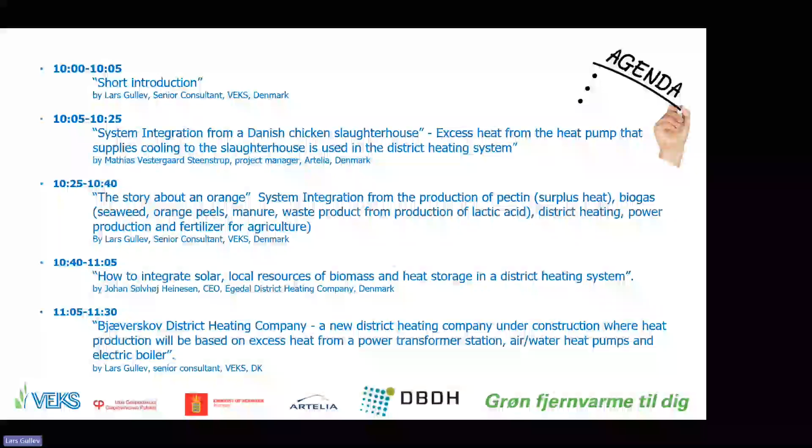District heating has until a few years ago been a secret in the European Union. It has not been on the agenda from our politicians in Brussels. But something has happened during the last 4 years. We have the EU Fit for 55 package with the aim to reduce the emissions of greenhouse gases inside the European Union by 55% by 2030.

And here, for the first time, the politicians introduced the so-called system integration or sector coupling. That was the first time that they put focus on the possibilities to connect the district heating sector with the power sector, the waste sector, the transport sector, to minimize the total emissions of CO2.

Then, as a consequence of the Russian invasion of Ukraine in February 2022, the European Union published RepowerEU back in May 2022, as an additional set of actions compared to what was already described in the Fit for 55 package, where the development and modernization of district heating systems would help replace fossil fuels with sustainable energy in individual homes.

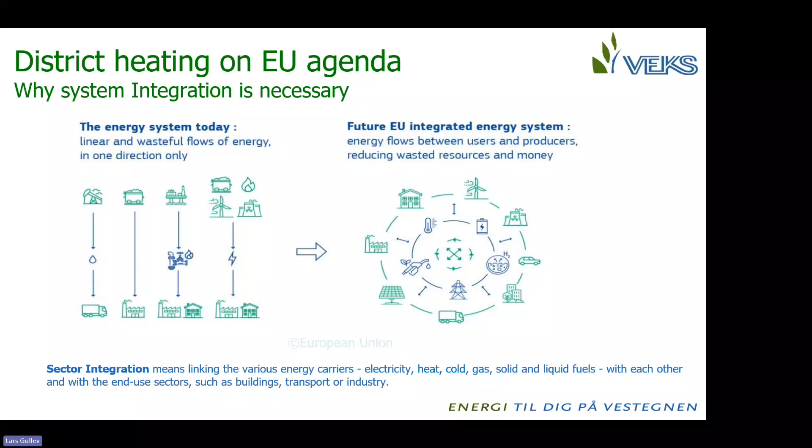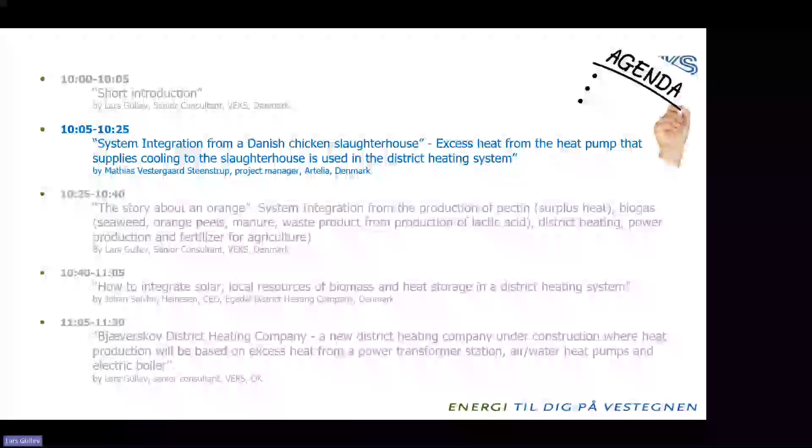And that's exactly what we try to put on the agenda for this webinar this morning, where we have 4 different cases describing different kinds of system integration between the district heating sector and other sectors.

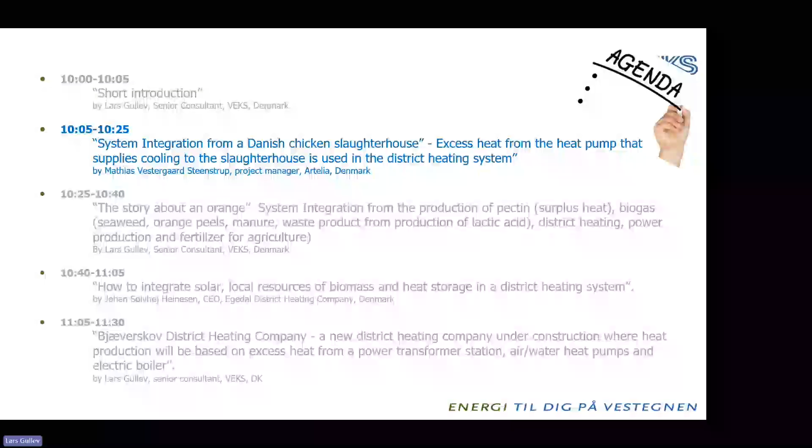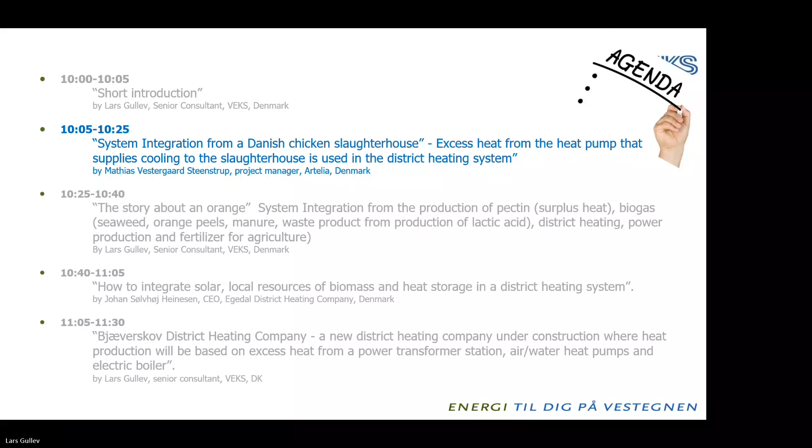So I will just start my presentation from the beginning here. Not sure if I can minimize this. Yeah. I hope that you can all hear me. Thank you, Lars.

I will start with a little correction to the headline. I'm talking about system integration of this Danish plant, but it's not a slaughterhouse, it's a processing plant, and I will come back to that later.

But in general, I'm talking about system integration in two ways: both the use of excess heat from industry, and also implementation of electricity-based production.

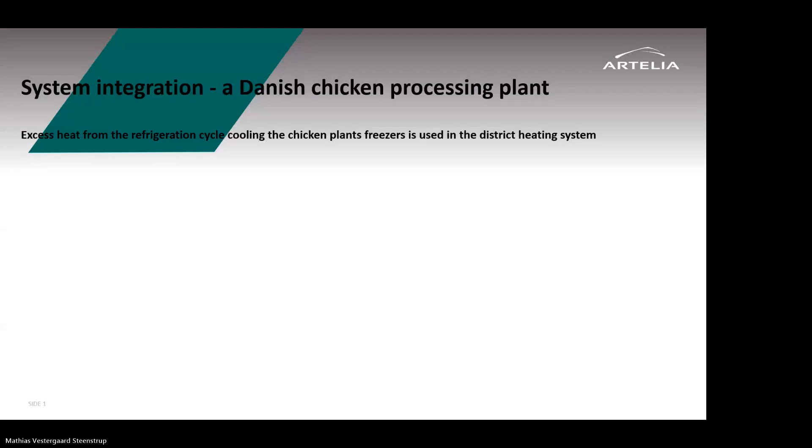Just a brief introduction to who I am and who Artelia, the company I work for, is. We are a company located all over the world, but in Denmark we have at least 1,300 people working in three main areas: buildings, energy and industry where I work, and infrastructure.

We have more than 90 years of experience, and we were part of the engineering team of one of the first large-scale power plants in Denmark. We're situated in 8 offices around Denmark, and if we look at the whole world, we have more than 9,000 employees located in more than 40 countries, with offices and projects in more than 100 countries, so more or less all over the world.

The case that I will be talking about takes place in the Danish city of Give, where a plant called Give District Heating is located. I think that Give is more or less a good representation of any given, or at least a typical, district heating plant in Denmark.

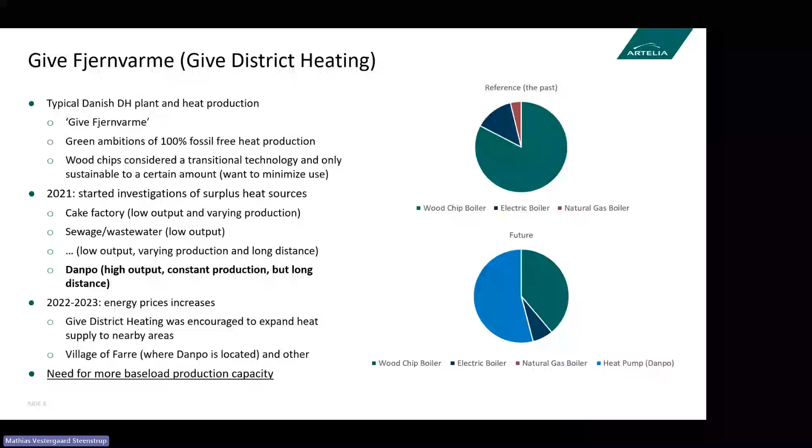And this village, Farre, is actually where Danpo is located. So now it would make sense in both supplying Farre with district heating and making the connection between Give district heating and the factory of Danpo. And of course, Farre is only one of the villages and cities that Give district heating could expand to. So this expansion of the district heating grid also increased the demand for baseload production.

So Danpo, it's not a slaughtering house, it's a chicken processing plant. I think one of the most famous products is probably the chicken McNuggets, which they produce in large scale. And actually, the excess heat is not coming from processing the actual food. It's coming from these freezer houses and the refrigeration cycle used to cool these freezers.

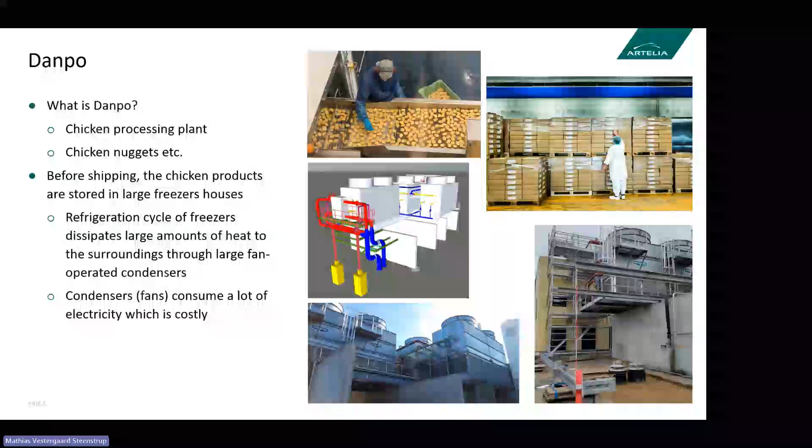This is actually the way from Danpo all the way to the consumers distributing heat. So we have to the left the freezer house of Danpo, and they have these condensers which blow air of approximately 10 to 20 degrees of heat out into the atmosphere. Instead of using these condensers, we put this heat in a heat exchanger, and I will show you a map later.

But the heat is then transferred from the Danpo factory to a building housing the heat pump. The thing is that the space or the area around the factory is more or less occupied, or the Danpo factory wants to save area for future upgrading of their production lines and so on. So actually there was a need to find another location for the actual heat pump.

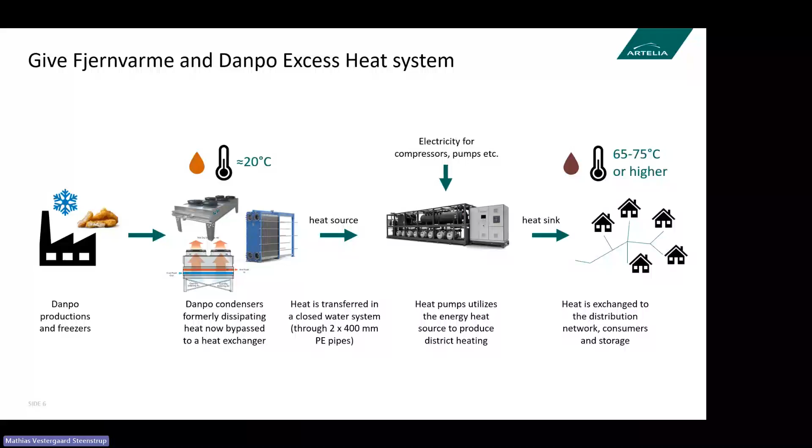Now, in order to make an agreement with a private company such as Danpo, there's a lot of considerations that has to be made. Of course, what will the price of heat be? So you're exchanging something that may not be of value to Danpo, but you are making some interference within their production, so there will probably be a price of that heat.

Also, the district heating had to consider how reliable this source of heat would be. In this case, the freezer houses will be running constantly, and they had actually plans of expanding the freezer houses. But as it is with any private company, the source of heat cannot be relied on 100%, as Danpo is on the free market as any other private company. So you have to consider what would be the outcome if Danpo decreases their production or if the company closes. That's many of the considerations that you need to make.

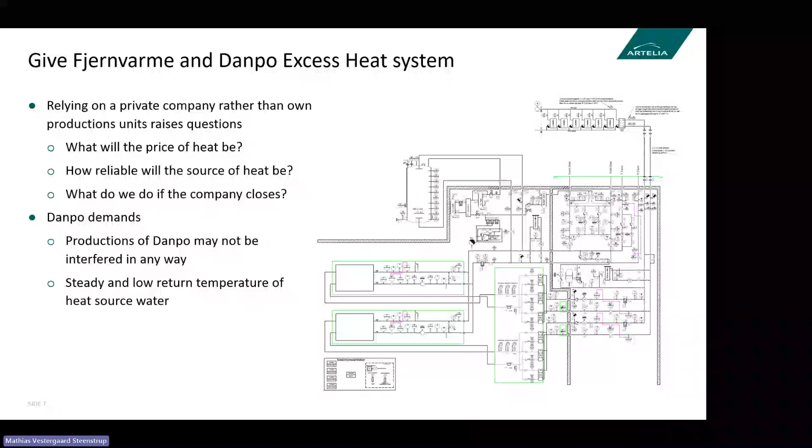Actually, as I said, the production from Danpo is more or less constant, but in the summer they actually have a slightly higher cooling demand because of the ambient temperatures and so on. So actually, in the summer we can produce more heat from Danpo, which is not really of interest to the district heating company, as we consume the most heat during the winter.

So it's quite an opposite situation we have here, and that's also why we in this project made a storage, quite large storage, so that it can also handle future industries and excess heat sources, just like Danpo. So most of the heat in the summer will be transferred through this transmission line of 4 kilometers up to the Give District Heating central.

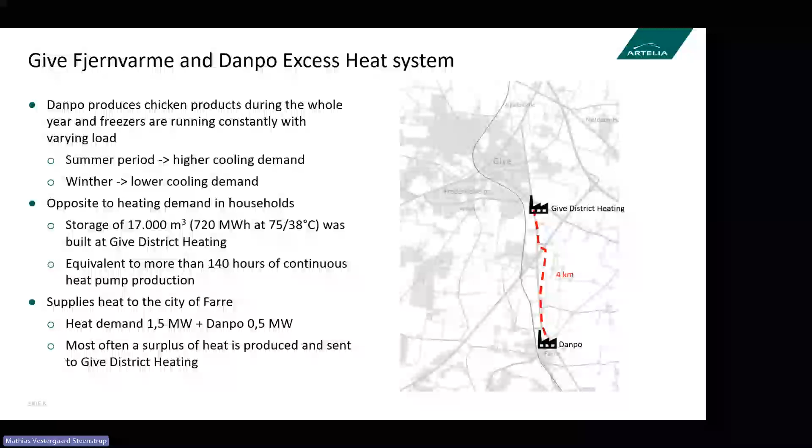This is a map showing that we have Danpo located here in the northern part of, or actually the picture is turned around, so it's actually the eastern part of Farre. And we have this red line, which is the line of this, we call it process water. It's a closed line between the Danpo evaporator or condensers and the evaporators of the heat pump. I think it's around 700 or 800 meters.

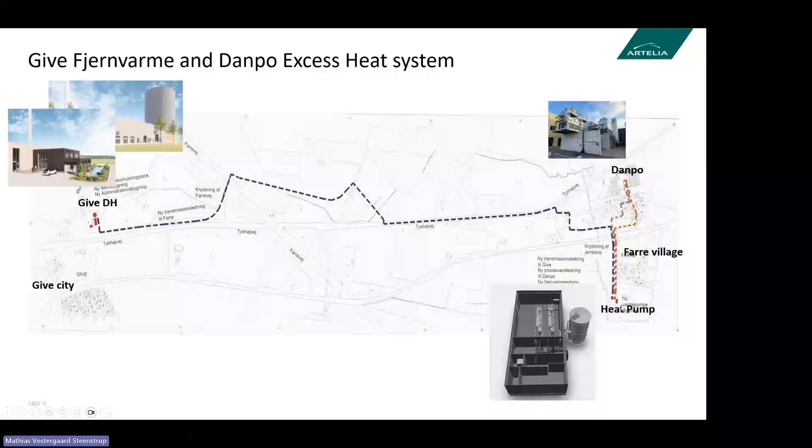We're transferring this process water of 10 to 20 degrees, which is then cooled in the heat pump building and sent back to Danpo. And then we have the transmission line going all the way from the heat pump building to Give District Heating. And of course we have the distribution system for the Farre city to distribute heat to the consumers there.

The heat pump is made of 2 modular heat pumps called H3000. It's a Fenagy heat pump, utilizing CO2 as a refrigerant. Could also be other refrigerants, but at this moment CO2 was the most feasible refrigerant, and these heat pumps were chosen because of the efficiency and the reliability.

So it can produce around 5 to 6 megawatts of heat capacity. I actually think it can produce more than 6 megawatts. I have a sample from the commissioning, which is ongoing right now. Only one of the two heat pumps is in operation, but as you can see in the graph, we are producing just above 3 megawatts of heat.

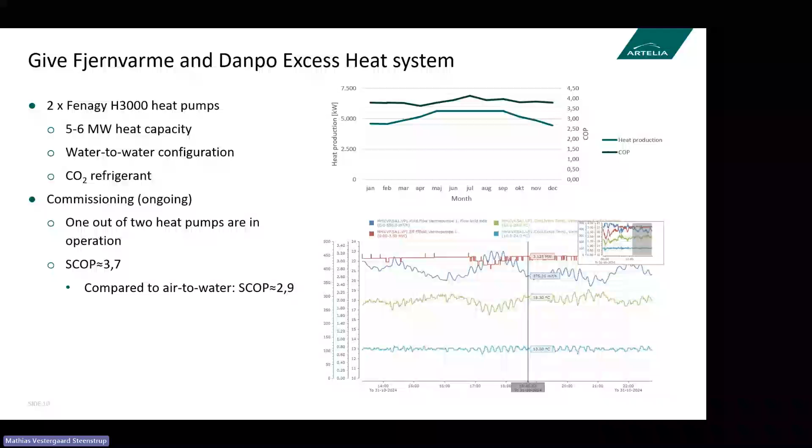I do not have the COP here, but from this commissioning I was told the average COP was around 3.7. To compare with an air-to-water heat pump under these conditions, the average COP would be around 2.9 over the year. So by utilizing this excess heat, we are increasing the efficiency quite a lot.

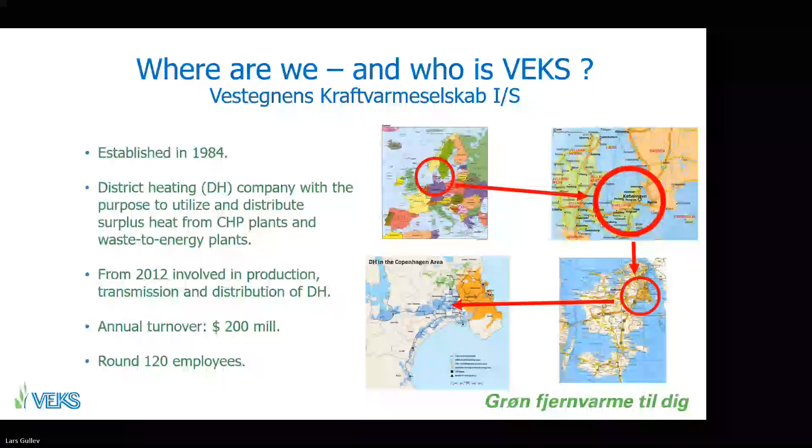We are part of the Greater Copenhagen District Heating Scheme, which consists of 4 district heating companies on the transmission level, supplying around 500,000 end users in 20 municipalities. The total system spans 40 kilometers from east to west, and I'm representing the company responsible for the district heating supply in the blue area.

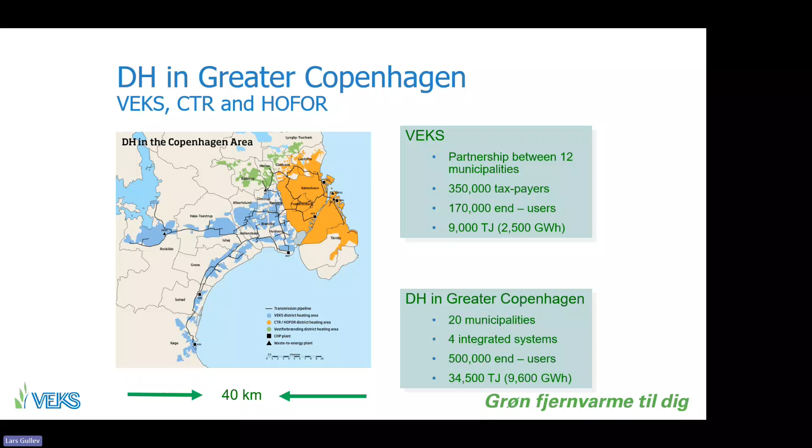The Danish district heating history is in fact the first step to system integration—integration between the waste sector and district heating sector. So the integration of renewable energy sources and system integration, it's not so complicated. In fact, it started more than 120 years ago, in the area where DBDH has its office. DBDH's office is neighbor to the place where it all started.

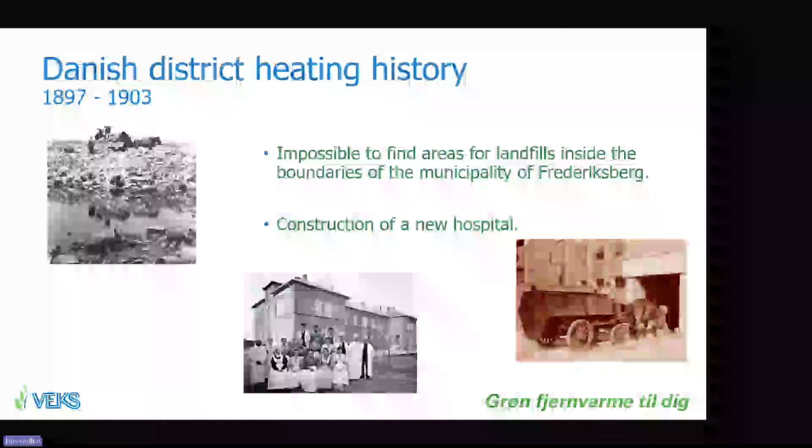Back in 1903, a waste incineration plant was built. The problem was that more and more people were moving to Copenhagen, and it was difficult to find free areas to get rid of garbage. Therefore, it was decided to build a waste incineration plant, utilize the surplus heat from that plant to heat a new hospital, and use the steam produced at the waste energy plant for cleaning equipment at the hospital. So this kind of system integration started back in 1903.

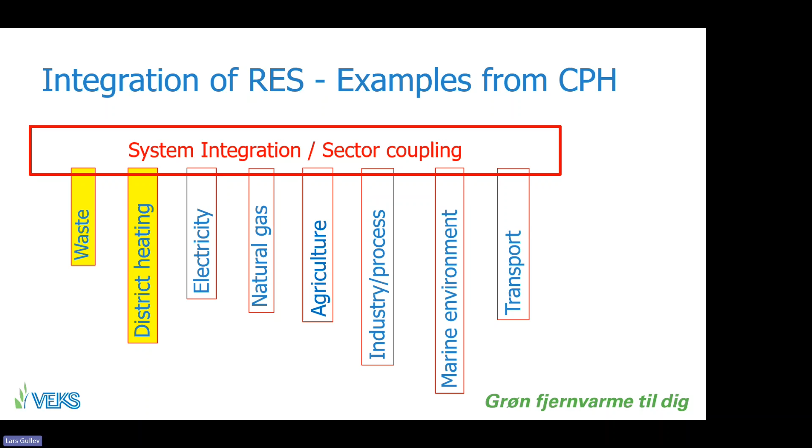We have developed the concept since. The case I will focus on in this presentation covers more than these sectors—it's a story about energy efficiency and storage, about an orange, where we cover all these different sectors. What we try to make in this case is a horizontal integration of waste, district heating, electricity, natural gas, the agriculture sector, the industry sector with utilization of process heat, the marine environment, and the transport sector.

How to do that—you can say it might be very complicated, and it is, but it's also simple when you've heard the history. It starts with oranges produced in Brazil. In Brazil, the oranges are juiced and oils are taken out of the peels. Then the peels are dried and shipped across the Atlantic Ocean to the eastern part of Denmark, to a city in the southern part of our supply area.

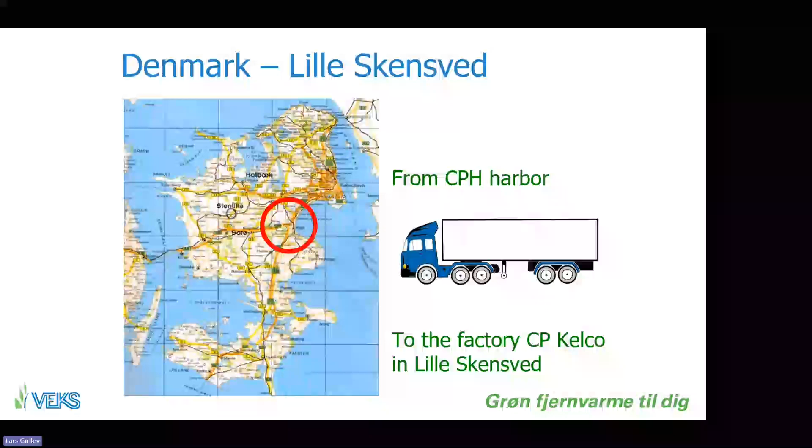Here you have the southern part of our supply area, where we have our own combined heat and power plant based on 100% sustainable biomass.

We have the CP Kelco factory where we utilize surplus heat, a gas engine, and a biogas plant. What we have here is a public-private partnership between CP Kelco, an American-owned company based in Atlanta, Georgia, and the VEKS company, which is a partnership between 12 municipalities.

So quite different partners here around the table: CP Kelco with 100% focus upon profit and very short payback time for their investments, and a district heating company with patient money, where we invest in projects with payback time between 10 and 20 years.

The purpose here is to utilize surplus heat from the CP Kelco production. What they produce is pectin, a product some of you have heard about before, and for some it's quite new. It's a substance you find in fruits, just inside the peels, and you use it to stabilize the viscosity of fluids. So you'll find this product in marmalade, in products from dairies such as yogurt and smoothies, and you can even find it in shampoo.

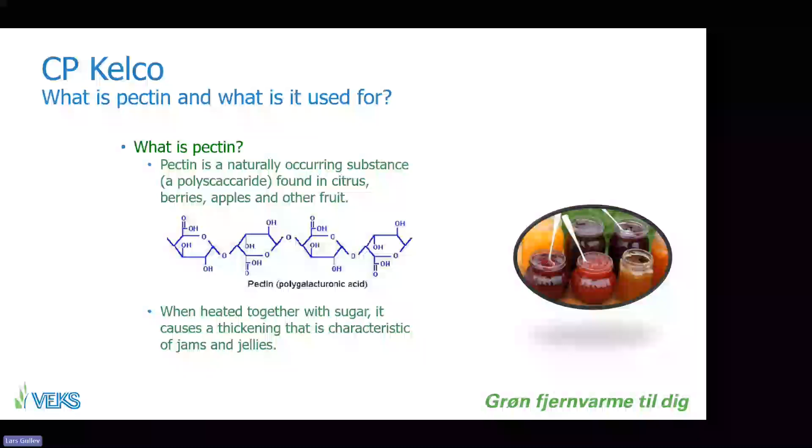During this process to extract pectin from the orange peels, they create a lot of surplus heat. Until we went into a dialogue with the company, they sent all this surplus heat into the cooling towers just to get rid of it. But we started a dialogue to look at the possibilities to utilize this surplus heat.

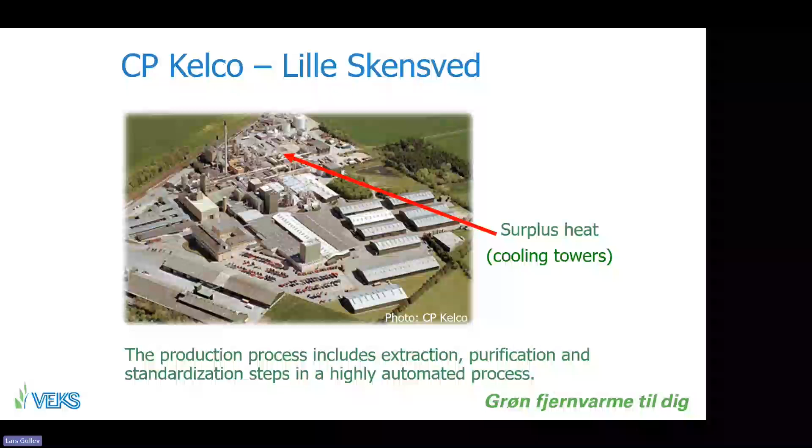We spent 2 years to make the contract and 1 year to fit together the pipes, and we established a connection to the factory you can see here. To the left, we have the process water from the company with a flow temperature of 75 degrees C, and then we have the return pipe from the district heating system with a temperature of 47 degrees C.

Then we heat the district heating water in a heat exchanger and increase the temperature from 47 degrees C up to 72 degrees C. Part of the year, that's enough as flow temperature in the district heating system.

In winter time, it's necessary to boost the flow temperature from 72 up to 85 degrees C, and we do that by using a heat pump. So we have a district heating flow temperature of 85 degrees C.

At the moment, the heat production from this unit, from this factory, covers around 50% of the heat demand in the city. In the future, it will cover 1/4, 25%, because we are developing the district heating distribution systems in this area in the regime of Køge District Heating Company.

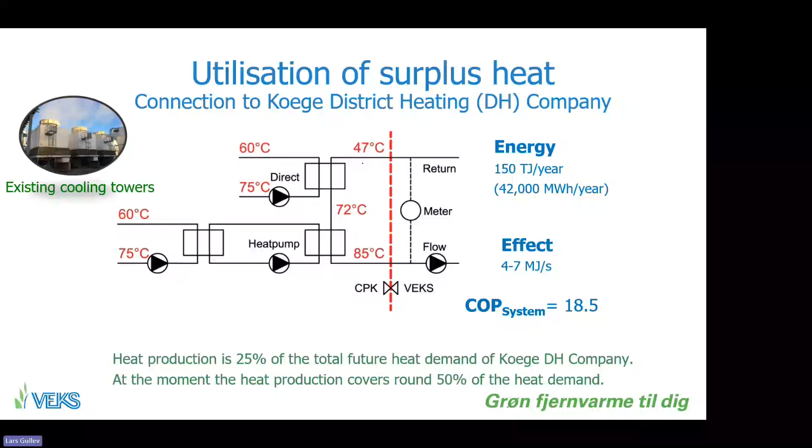The agreement's benefit for the factory is that they now have a good customer which takes heat all year. Their alternative to making this agreement was to cool off the surplus heat using cooling towers.

The benefit for us is that we have a constant supply of surplus heat, which in the next years will be relatively cheap heat, and that will support... the consequence is that we will have a lower price for the heat coming from this factory than our alternative heat suppliers. For both companies, it was amazing to see how important the green footprint of this process was, even for an American-owned company.

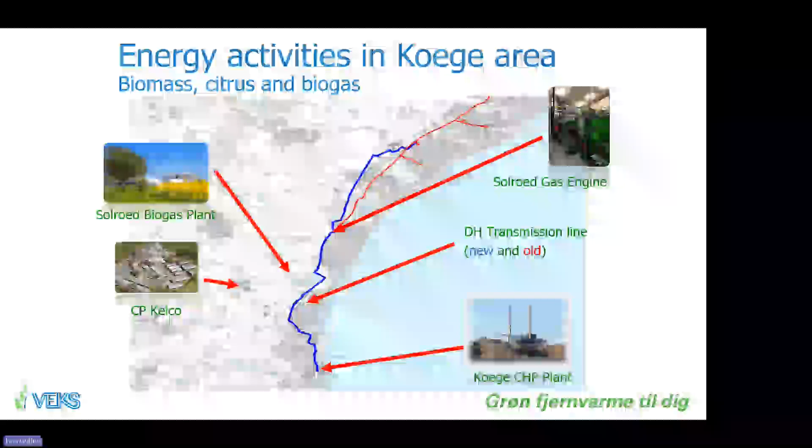When they have taken out the pectin from the peels and we have utilized the surplus heat, the peels are brought to a biogas plant. In this biogas plant, they put 80,000 tons of these orange peels, 53,000 tons of manure from cows and pigs, more than 7,000 tons of seaweed from beach cleaning, and 60,000 tons of a byproduct from a pharmaceutical production. So all these raw materials are mixed together.

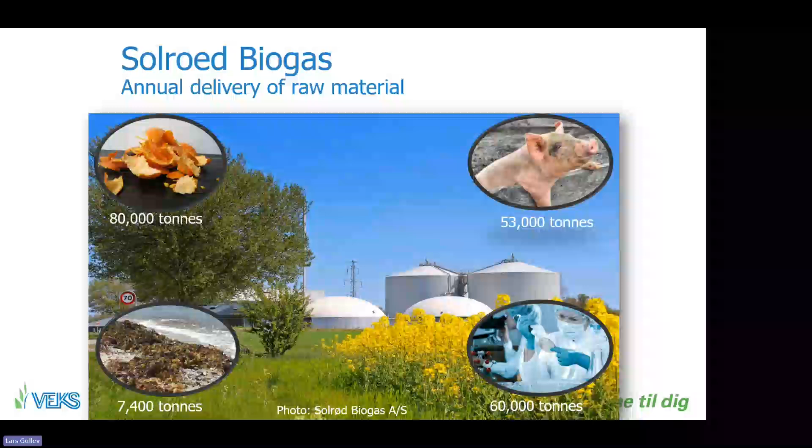As a spin-off of these processes, they generate a lot of biogas. This biogas is produced at the Solrød biogas plant. It's owned by the municipality of Solrød, and the municipality has signed a 5 years operation and maintenance contract with a private company. So they are not directly involved in daily operation of the plant, they are just owner of the plant.

Then Solrød Biogas made the contracts to buy the raw material from the farmers. They contract to buy these orange peels and also the byproduct from the pharmaceutical company. Then they sell the biogas partly as upgraded gas to the national natural gas grid or network, and partly as biogas to our company VEKS. And then they sell the degassed biomass to the farmers, and I will come back to that.

So VEKS, we buy the biogas, we use it in a gas engine, we sell the electricity from the gas engine to the power grid as green electricity, with an attractive feed-in tariff. And then we provide district heating for the transmission and distribution network based on the cooling of the gas engine.

The raw material you can see here contributes to the total gas production in different ways. The primary production of methane is based on the materials from CP Kelco. Around 75% of the total amount of methane is based on these orange peels. But the rest of the raw material contributes to the production of biogas and to the afterward degassed biomass in different ways, and you will see that later in this presentation.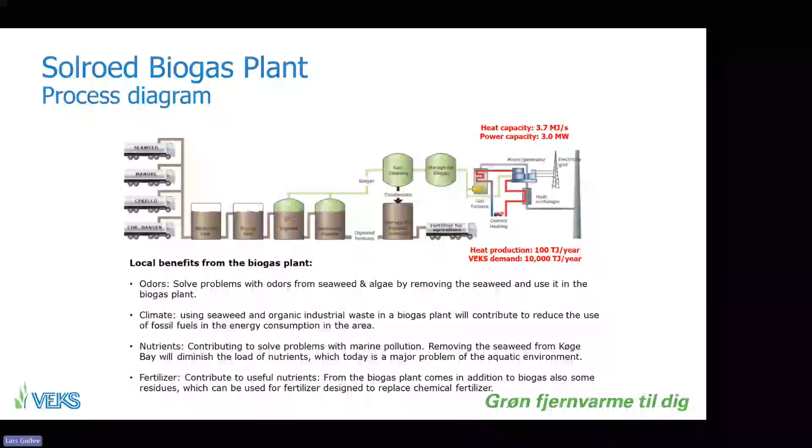We have made an agreement with the Solrød biogas plant. We have invested in the gas pipeline and the gas engine. If Solrød biogas plant decides to stop the delivery of biogas to us before we have depreciated our investments in the gas engine and gas pipeline, we will be compensated for the remaining depreciation. So we have no risk there. We have a guaranteed production price out of the gas engine, linked to the cost of buying heat from waste-to-energy plants - it's 10% lower than our price if we should buy the heat from a waste-to-energy plant instead. So we have no finance risk in the contract.

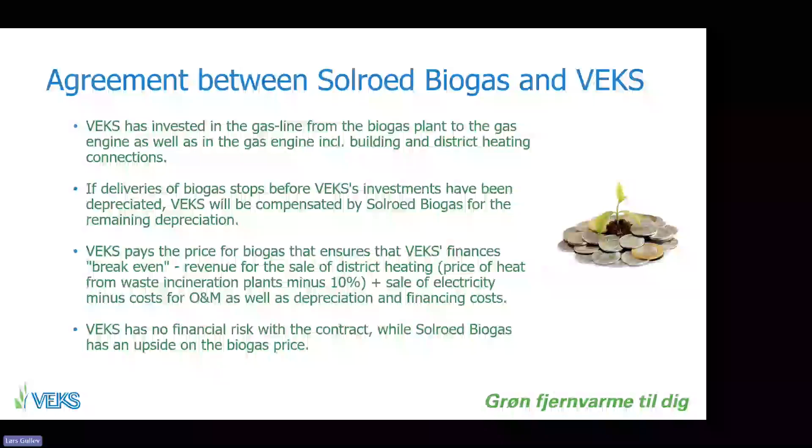While Solrød Biogas has an upside on the biogas price, we have no risk but also no profit. But we have a guaranteed economy in this agreement. The gas engine produces 3 megawatt green electricity to the grid and 3.7 megajoule per second green district heating as output.

When the biomass is degassed, it's brought back to the farmers where it substitutes conventional fertilizer, which is a big benefit for the environment. So it's circled back to the farmers, the manure they brought into the biogas plant. This biogas plant is essentially an environmental installation which solves environmental challenges, and then it has biogas or energy as a byproduct.

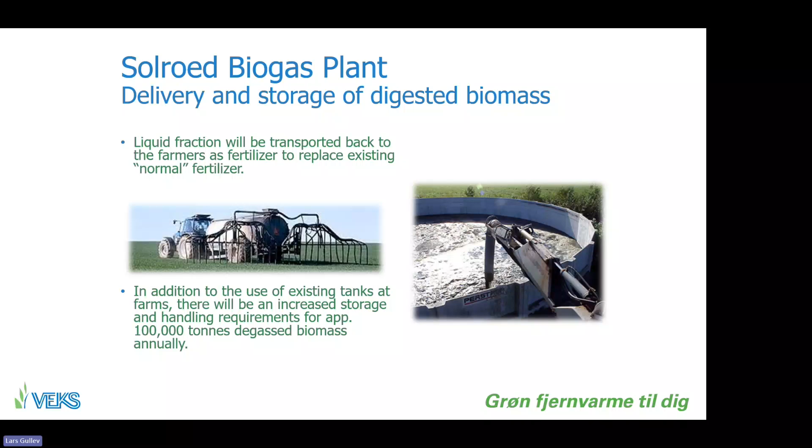What you see here is important for the environment. We reduce the CO2 emissions dramatically. We reduce the amount of nitrogen and phosphorus, which otherwise from the farmers were washed out to the Baltic Sea, which would influence the environment in the Baltic Sea, both for us as Danes, but also for you as Polish people.

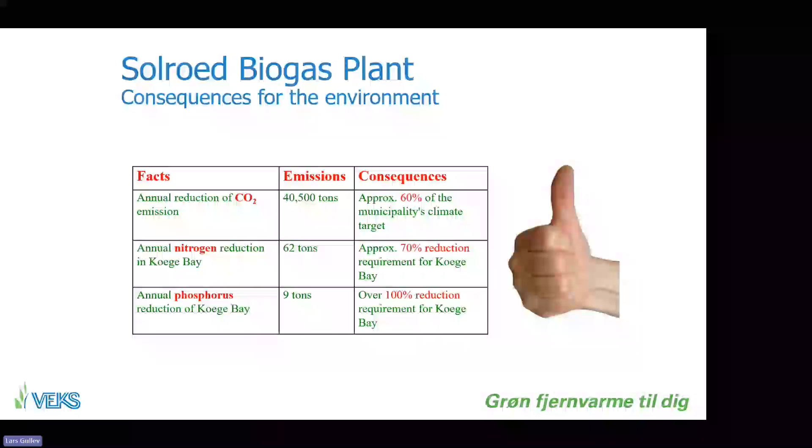So this is an example of how we, with this concept, have integrated all these sectors. And when I mention transport here, it's because when they upgrade this biogas and put it into the national natural gas network, this gas can be used for transport for heavy traffic.

So to summarize, if we want to utilize these renewable energy sources, it's necessary that we have a well-functioning district heating system, because without such a system we couldn't use the surplus heat from the production of pectin, and we couldn't use the biogas in the most efficient way. So without a well-functioning district heating system, these huge renewable energy sources would be lost for society.

It's also important to mention that it takes time to set up such a concept, which we have done here. The secret is that you need the imagination to look at one process and see what byproduct or waste product you have, and for which process can this byproduct or waste product become a resource instead of a waste product. That's what we have succeeded with here.

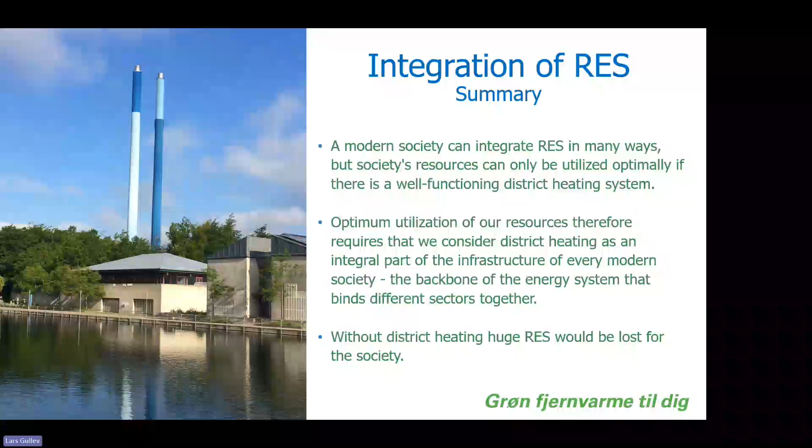We have got cheaper district heating for our customers. We have solved environmental problems with emissions of phosphorus and nitrogen, and we have reduced CO2 emissions. So all in all, a good project with a short payback time.

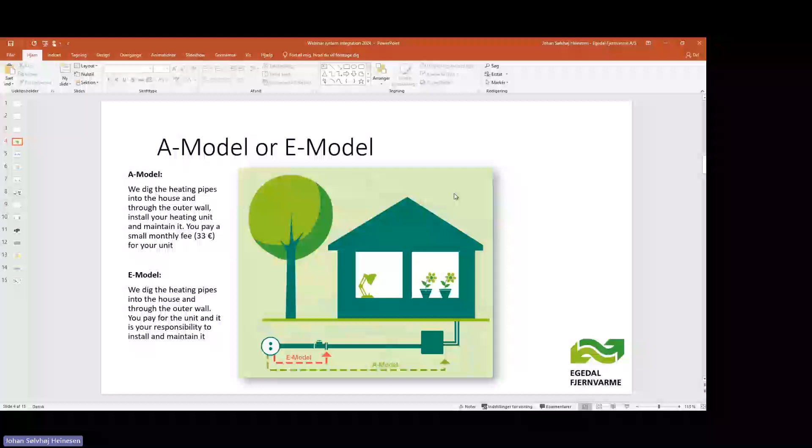So we get rid of the old boiler and install an HIU, and we own it and maintain it, and they only pay a small monthly fee. So all they have to do is pay 2,000 euros to get a connection, and then we can look after the heating inside their houses.

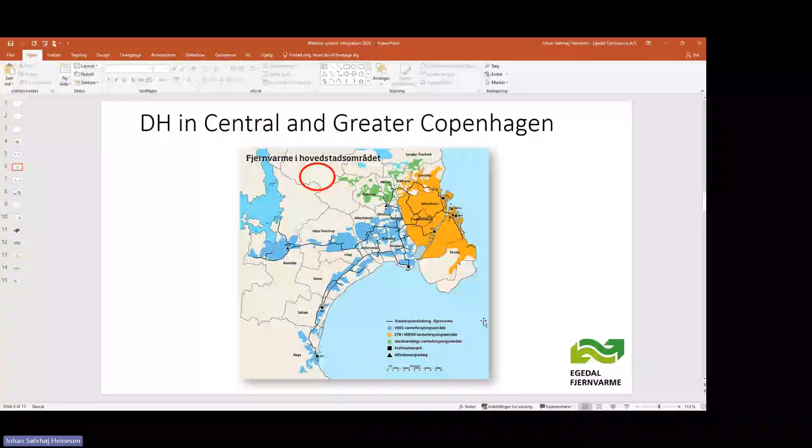But we are out in the middle of nowhere. You can see the system Lars works in, in blue, down south, and we don't really have a connection to anybody, so we have to look after our own production.

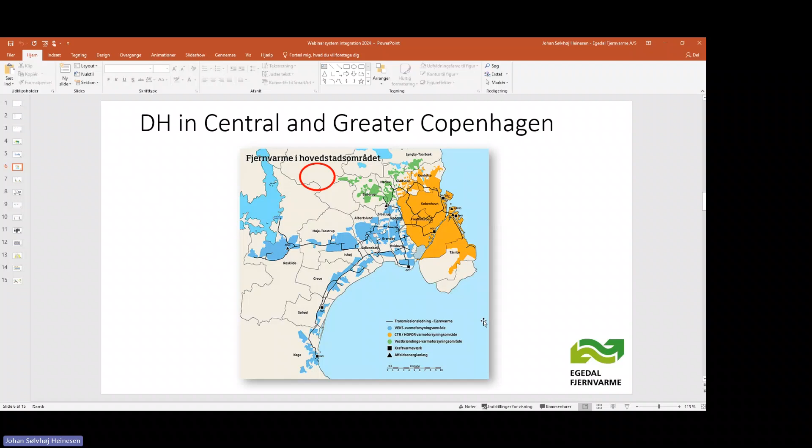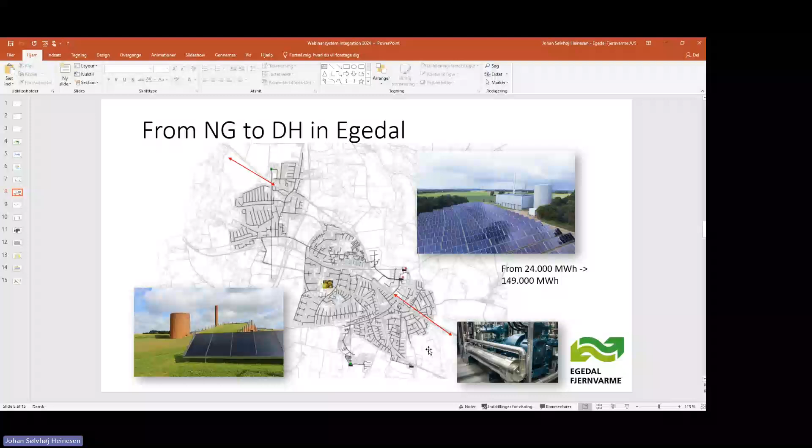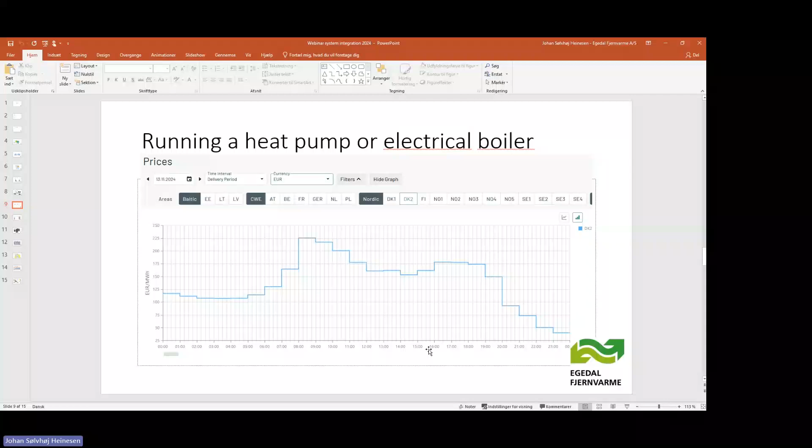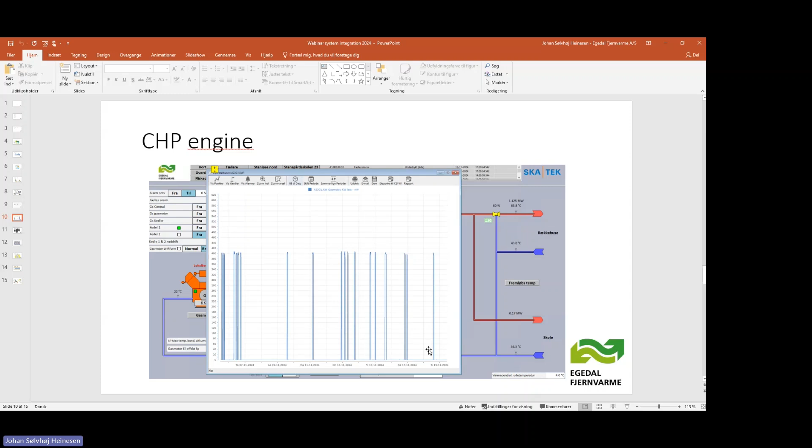We also have one small CHP engine left, and that is not being operated by us. Of course we maintain it, but it's being put into operation by an electrical operator. So every time the price of electricity is high, and it is that sometimes, then they turn on the gas engine, so we produce electricity for the grid and district heating for our network. We used to have 3 of them, but 2 were too old, so it wasn't a good business case to maintain them. Now we only have 1 left.

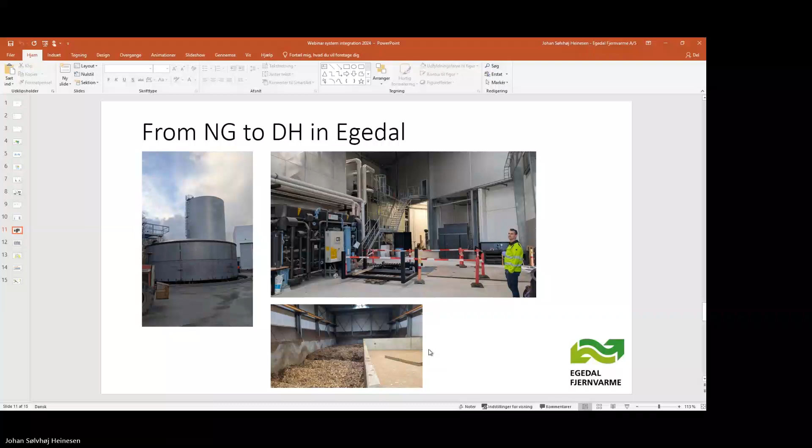This is just a picture of the biomass plant, where you can see the storage tank we have right now. And of course, we are running that.

They are looking at the price of electricity all the time, the guys operating it. So if the price of electricity is high, they are lowering the production on the heat pump, and then the biomass is taking over. But of course they want to run the biomass plant on a steady production, and not too higher production. So we always have the cheapest possible heat in our storage tank. And that's the way all the small Danish companies are using their plants, if they have biomass and other production as well.

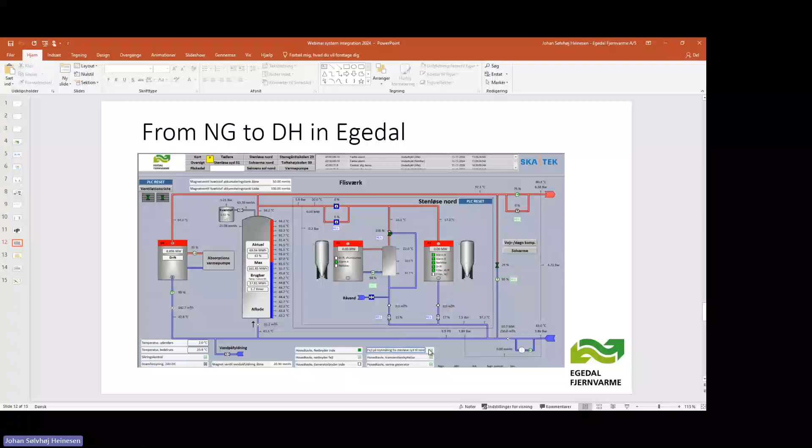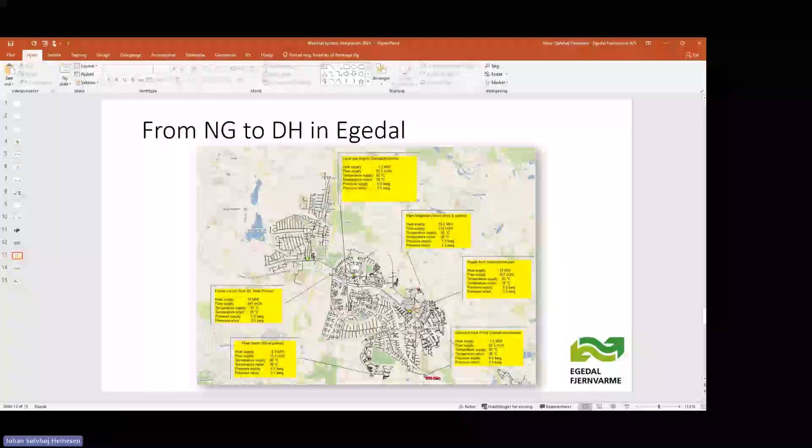Johan, could you go up to full screen? It's not in full screen. No, no. Okay, better now? No, it's the same, but I can see you do what you can. Okay, I'm doing what I can. Yes, sorry about that. I hope you can see something at least.

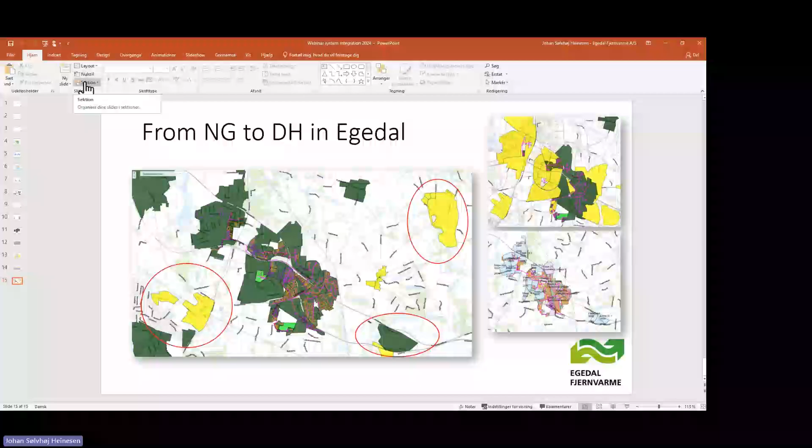Okay, good, thank you very much, Johan, for your timing of your presentation. Yeah, that's fine, because I could see that you were short of time, so I had to speed up a little bit. Yeah, fine. And I have to leave now, so if you have any questions, feel free to reach out. I know that Pia and Lars have my contact information. So, good, enjoy the rest of your day. Yes, thank you, and thank you for your help. Welcome, good.

So I will jump directly to the last presentation, and that will be a presentation about a district heating company which is just born, so it's under construction at the moment, but it's still interesting when we talk about system integration, and especially when we put focus on the process from the first ideas, the step from vision to...

You can't see it? Is it visible, my presentation? It works for me. Yeah, it works, nothing happens. Good. Yeah, okay, I'll just go on.

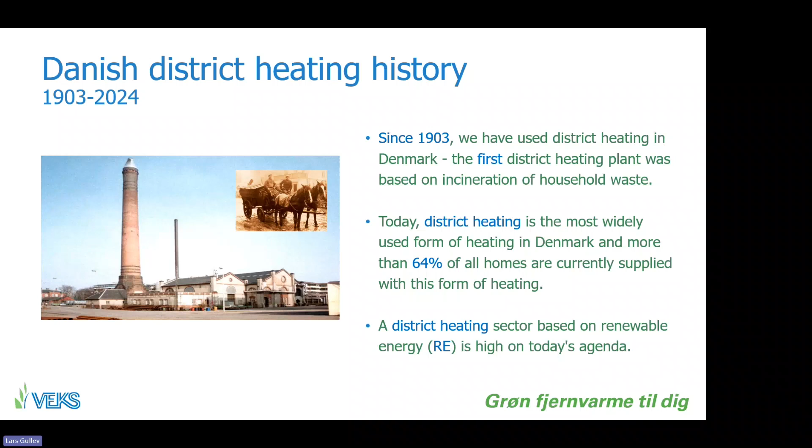As mentioned in my first presentation, we have worked with district heating and system integration since 1903. And today we are in a situation in Denmark where 64% of all homes are supplied with district heating, so it must be described as a success. District heating based on renewable energy is high on the agenda today, also in the Danish parliament. But we are not done yet, we are still expanding the district heating systems in Denmark.

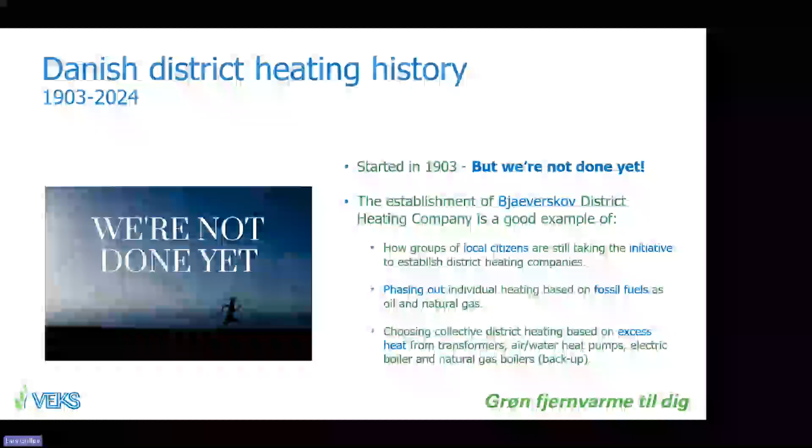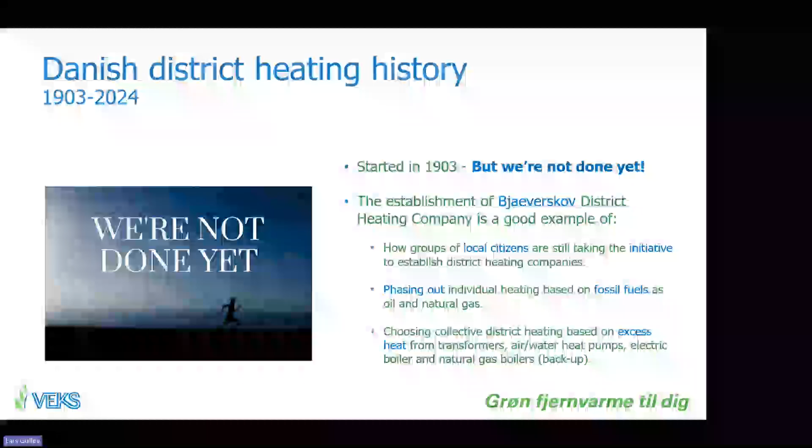This presentation will put focus on a new district heating company, the Bjæverskov District Heating Company, where a group of local citizens have taken the initiative to establish a district heating company from scratch. They wanted to phase out individual heating based on fossil fuels such as oil and natural gas, and they have chosen district heating based on excess heat from power transformation stations, from air-water heat pumps, and from electrical boilers, with a natural gas-fired boiler as backup.

So here we have system integration between the district heating sector, the electricity sector, natural gas, and again an industry process, if you look at a power transformer as a kind of industrial component where you have some excess heat. We are again in the eastern part of Denmark, outside the VEKS district heating supply area.

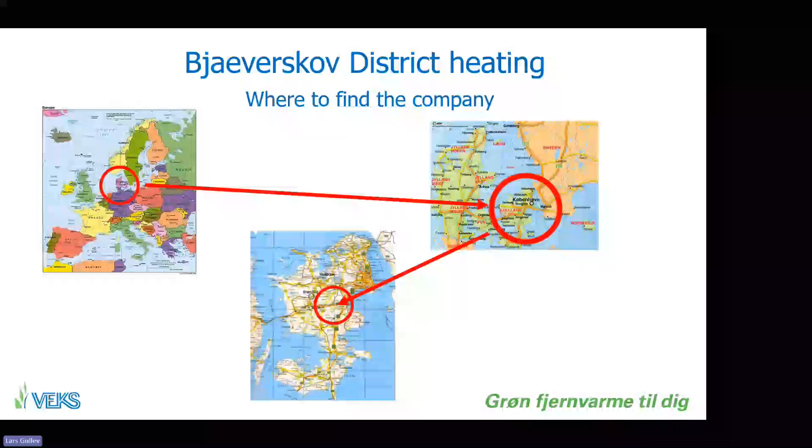What's interesting here is to put focus on the first steps, where we go from vision to action. Often we see a lot of visions in companies and municipalities, and nothing happens. Here we have the initiative and the first idea taken by the municipality back in 2020, when they made their climate plan 2020. This plan is based on the targets set by the Paris Agreement and the goals set in that agreement, where there was also, from the municipality side, a strong focus on how we could involve the citizens in matters that were important and directly influenced the citizens' daily life.

And here the citizens in this small city, Bjæverskov, were happy to look at the possibility of establishing a consumer-owned district heating company as the best choice for the overall green transition of the city. Their alternative could be to phase out natural gas and oil and instead install individual heat pumps. But when they chose this scenario to establish a collective solution, they made it possible to utilize the excess heat from the large power transformation station in the city.

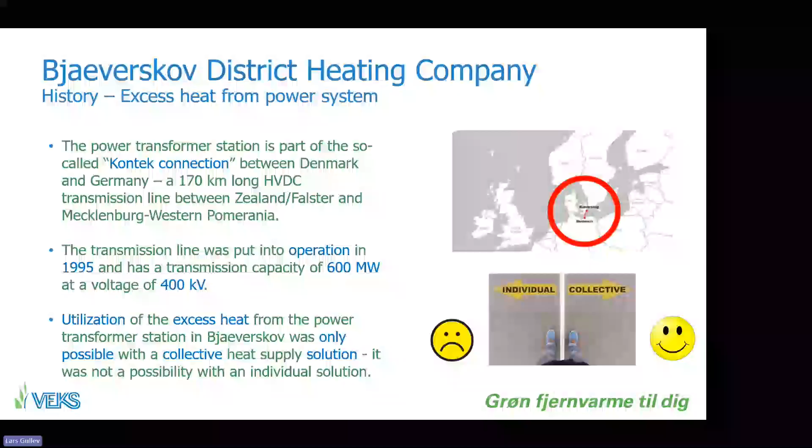Furthermore, we have a connection from the offshore wind turbine park in the Baltic Sea, the Kriegers Flak. There we have a Kriegers Flak combined grid solution connecting Kriegers Flak, which is Danish, with the two German offshore wind farms, Baltic 1 and Baltic 2, meaning we have a cable connection between Denmark and Germany, connecting these wind farms to both the Danish grid and the German grid.

So that makes it possible, even if we have no electricity production due to low wind in the Baltic Sea, to still use this connection between Germany and Denmark for energy flow in both directions. That means we can increase competition in the power market and at the same time improve the security of power supply to both Danish and German consumers.

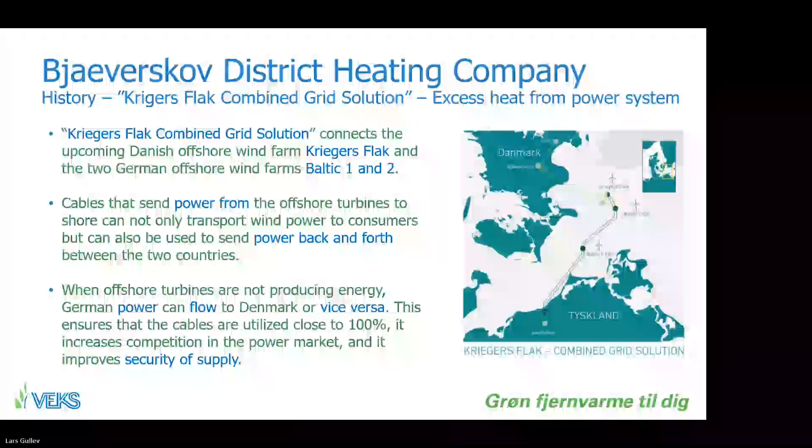The timeline is that the first focus was back in 2021, only 3 years ago. At that time, the focus from the inhabitants of the city was 100% environmental concerns about CO2 emissions. So it was environmental concerns which were the driver for the idea and for the process to go from vision to action.

Then, step by step, the focus changed as a consequence of the Russian invasion of Ukraine in February 2022. The focus on the benefits of this solution changed from being only about environmental concerns to also being a driver for how to phase out natural gas as fast as possible, to increase the security of heating supply to our city. In summer 2022, this consumer-owned district heating company was established.

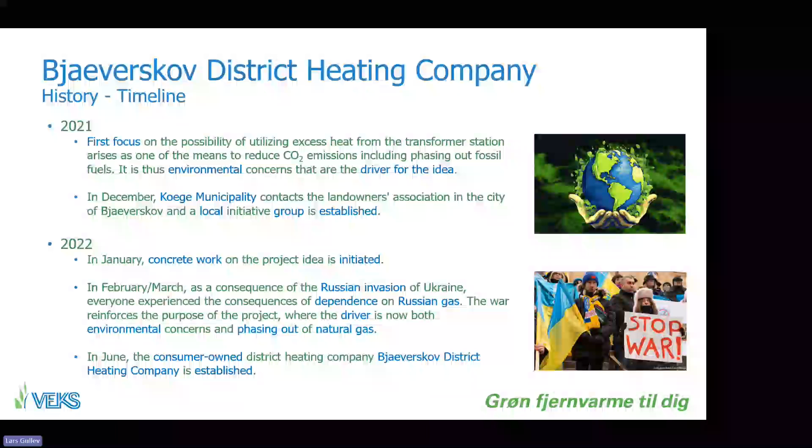Through 2023, they made different project descriptions and had a dialogue with the Danish Energy Agency. They applied for construction grants to the grid in April, and already in June, just two months later, they received acceptance from the Danish Energy Agency for grants to construct this new district heating pipe system, financed by the District Heating Fund. So only two months from applying until acceptance - a very, very fast process.

In August last summer, the project description was approved by the different departments in the municipality, and in October, the city council of the municipality of Køge approved the construction framework for this project. So a very fast process during 2023.

This year, they started calling for bids for the construction work. They made a contract with the energy consulting company, and the municipality approved the sale of a piece of land for the district heating company's construction of production facilities. In June, the construction framework was approved by the Finance Committee and City Council in the municipality of Køge, and the contract was signed with the contractor. In August, they started construction of the pipe network, and during winter 24-25 they will start construction of the future heating plant.

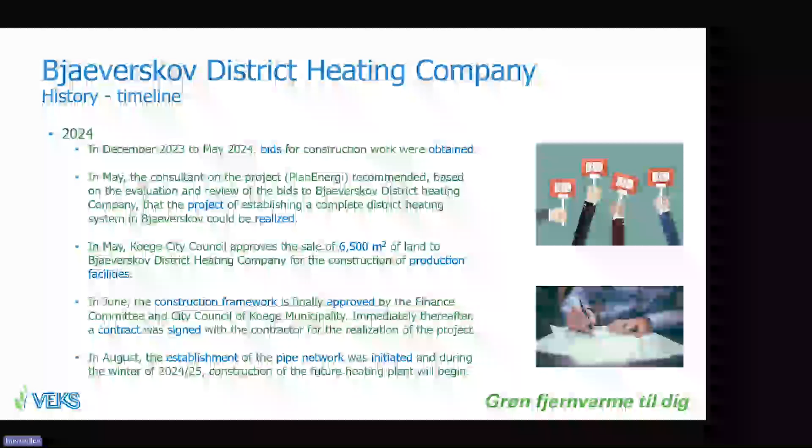So an extremely fast process in dialogue between the municipality, inhabitants of the city, and the construction of the pipe network. In total, there's potential for 1,000 homes, and now here in August, they have signed contracts for almost 90% of the homes. Amazing, and I'll come back later to what the secret is behind this success.

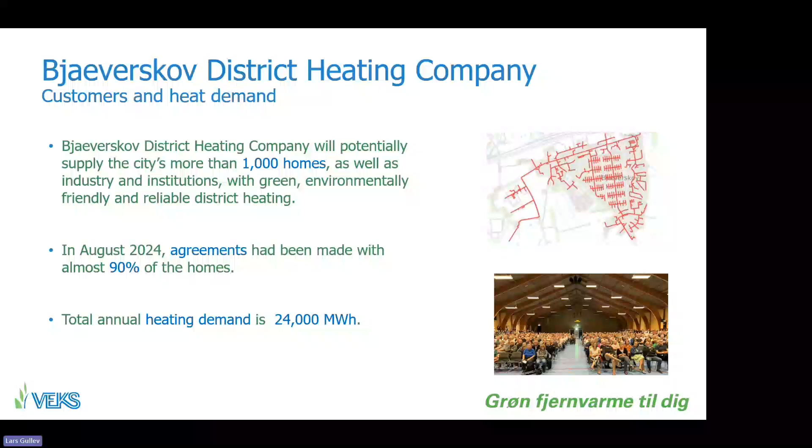The total heat demand is around 24,000 megawatt hours. It's estimated that excess heat from the transformer station will cover one third of the heat demand in the city. The excess heat comes from cooling the valves of these transformers, and the hot water from that is approximately 35 degrees C, which is then raised to 75 degrees C via a heat pump. So it's possible to use this flow temperature of 75 degrees C in a district heating pipe system.

Furthermore, they now have a working group under construction which will focus on the possibilities to utilize more excess heat from this transformer, because there's also a possibility to utilize cooling of the transformer oil, and that could be a possibility in a later phase of this project.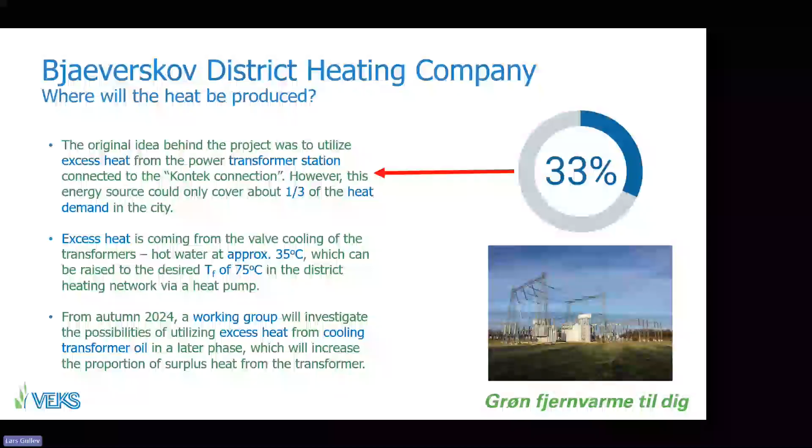The last two thirds of the heat will be covered by non-fossil energy sources. They establish air-water heat pumps with a capacity of 4 megawatts - as mentioned in the first presentation by Matthias, here again it's heat pumps from the company Fenagy. They will cover one third of the heat demand, and then they establish an electrical boiler of 11 megawatts to cover the last part, another third, of the heat demand.

Then they establish 2 natural gas-fired boilers for peak and reserve load production, and also to ensure that if electricity prices are extremely high, it could be a solution to produce the heat based on a gas boiler instead. But as a starting point, the gas boilers will only be used for peak and reserve load production.

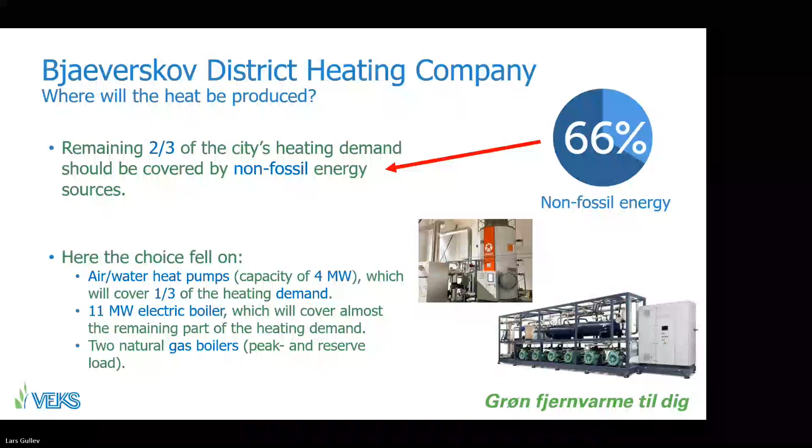To ensure flexibility between heat demand and heat production, they also established a heat accumulation tank, a steel tank of 4,200 cubic meters. The one you see here is my own picture - it's a heat accumulator under construction in Romania. They start from the bottom and then push it up. That's the way we do it.

Sometimes it seems cheaper to construct these heat accumulator tanks in Denmark than in Poland. We joke a little bit about it, because we've offered to re-import excellent Polish labor from Denmark, so you can make your heat storage tanks cheaper in Poland than you do today. But I don't know if circumstances will change - at the moment we are primarily joking about it.

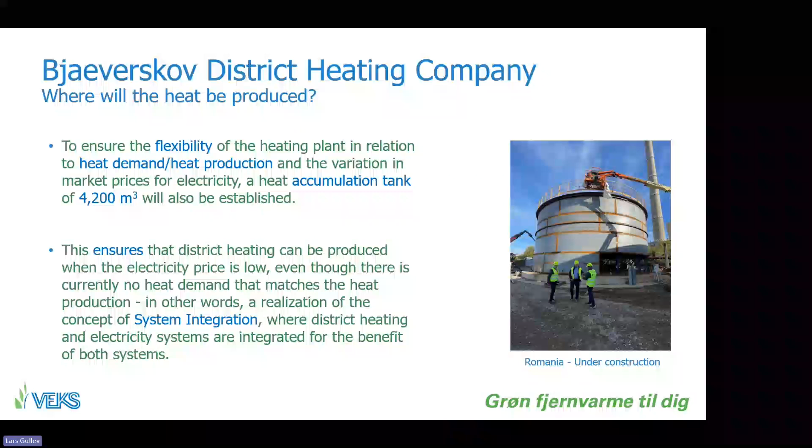To ensure that district heating can be produced when the electricity price is low, here we have a system integration between the district heating system and the power system. Again, we see the benefits for both systems by making this integration. We have this preliminary model of the heat plant where we have the heat accumulator, then the building with administration with heat pump, electrical boilers, gas boilers, and other space for technology, and then we have the cooling fans. So relatively simple.

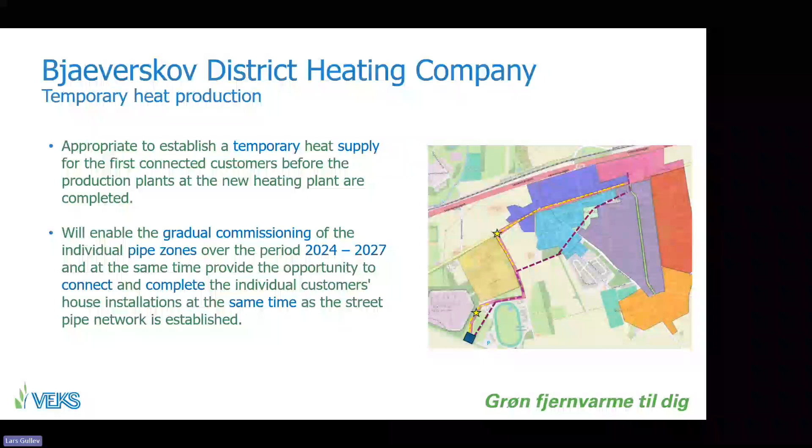To increase the economy in the project, they decided to start up a temporary heat supply so they can supply the first connected consumers before the production plant is completed. That means they'll be able to make a gradual commissioning of the pipe systems, splitting it up in different zones over the period from now until 2027. So they can connect consumers as quickly as possible, at the same time as the street pipe network is established. The benefit of this concept is that the contractor only has to work around the customer's land plot once during construction.

It's an advantage for the overall economy in the district heating company because it makes it possible for the plant to sell heat to customers earlier than the budget behind the project anticipated - it's possible to sell heat to the first consumers already in January 2025. This temporary heat production will come from a natural gas-fired boiler in a greenhouse in the city.

The economy for customers is also important, because their alternative to district heating was to continue with natural gas or to establish an individual heat pump. So they calculated the running cost for these different kinds of heating for the buildings, and they are more or less at the same level. As you can see, it's a little bit cheaper to continue with natural gas-fired boilers than to convert to district heating or heat pumps. But even so, more than 90% have decided to switch from natural gas or oil to district heating.

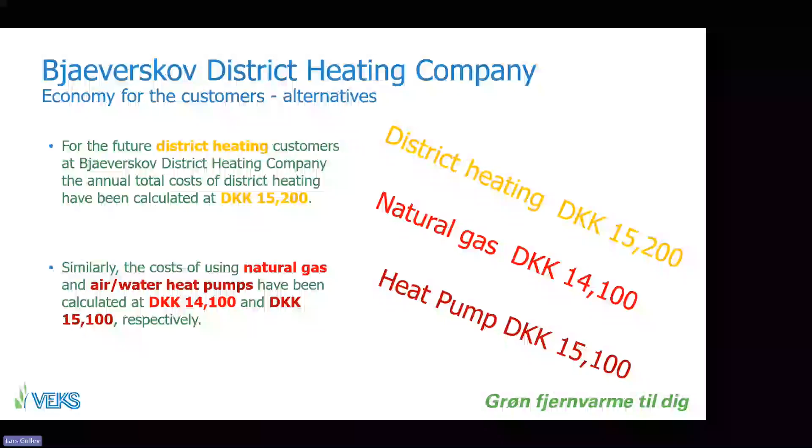Why do they do that? The background is probably that the district heating company has built up a district heating tariff where the upfront payment for customers connecting to district heating is relatively low. The district heating company will take care of the investments in the heat exchanger installation, so that's included in the heat price you saw on the slide before. So the upfront payment for a district heating consumer is 5,000 Danish crowns.

If you are in a situation with an old gas boiler and need a new one, you have to invest 40,000 Danish crowns. And if you instead decide to go from individual natural gas to an individual air-water heat pump, the investment costs in Denmark are between 100,000 and 120,000 Danish crowns. So that's probably the background for the success - the district heating company has set up a tariff which makes it very attractive for customers to connect, because the upfront payment is much, much lower than the alternative if you decide to continue with a new gas boiler or an individual heat pump.

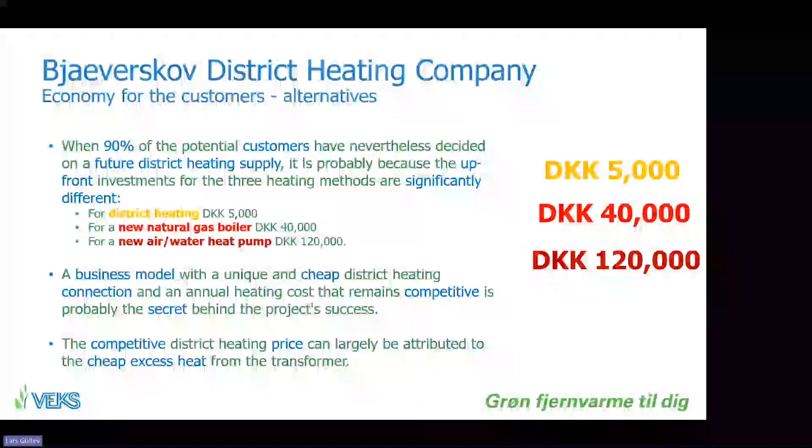So the tariff structure here is very important. Integration of surplus heat from the transformer station, district heating, electricity, and natural gas - that's what you see in this project.

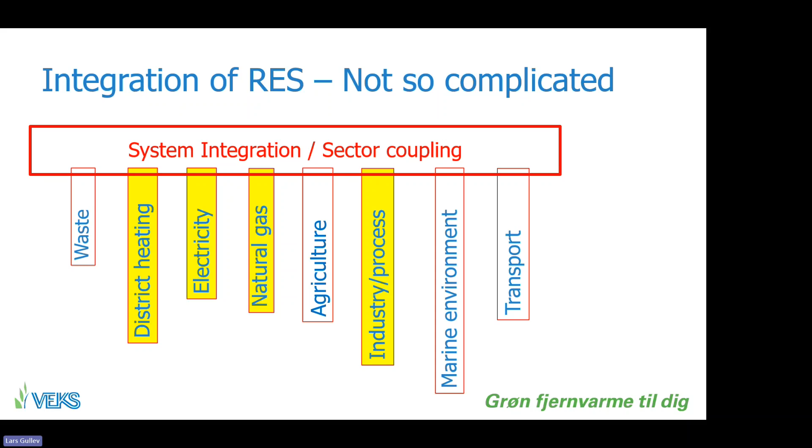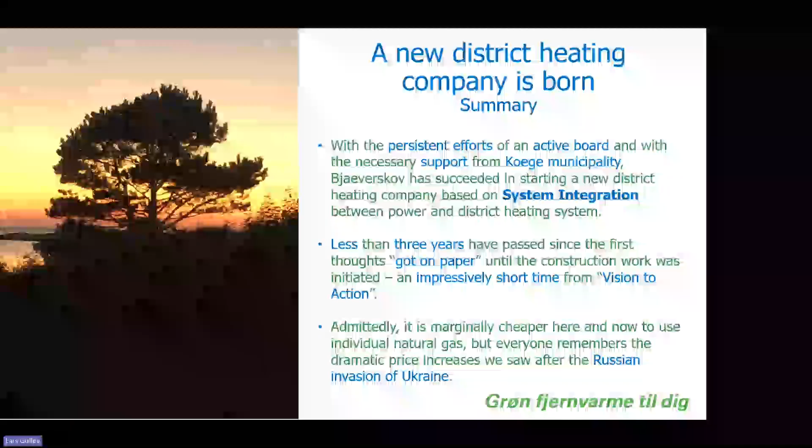We have had very close cooperation between the municipality and the citizens in the city, and they have together chosen a system based on system integration between power and district heating system. They have spent less than 3 years since the first thoughts got on paper until the construction work was initiated. Very short time from vision to action.

Not at last, but not at least, the Russian invasion in Ukraine has made it so important for people to reduce the dependence on gas and instead go on electricity. And here, the cheapest electrification of the heating in Bjæverskov was to utilize surplus heat from this power transformer station in connection with heat from air water heat pumps and electrical boilers.

It's also important that more and more people are leaving the natural gas system in Denmark, and that means that the remaining customers face increasing cost, because now there are fewer customers to cover the fixed cost for operation in the natural gas system.

It has been important for people to get access to green, reliable, and competitive heating prices, as they can do with this district heating connection. And what we see in many cities based on that kind of heat in Denmark is that the prices for houses are increasing. And that's, of course, a benefit for the homeowners just now, because there's an upside if they later are going to sell the houses. And this upside should not be underestimated.